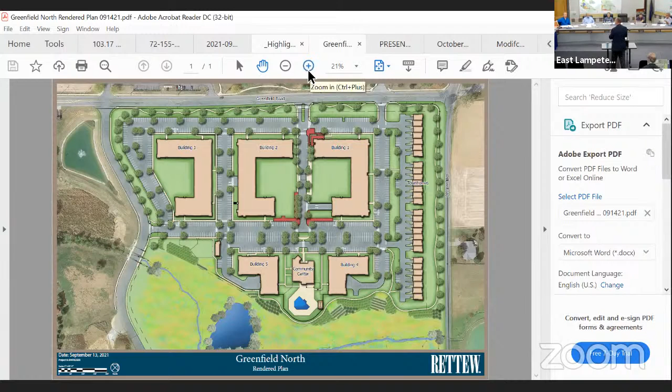Greenfield North, which is depicted on the color rendering and also on the screen, is a multi-family project that we talked to the board about in the past, consisting of 615 total units, 587 apartments, and 28 townhouses along Willow Road.

We're in receipt of the DMA review letter number 2. Review letter number 1 is considerably longer than what we have right now, and the planning commission presented to them this week, thanked us for working together with staff and carrying that review letter down. We're also in receipt of the Lancaster County Planning Department memorandum. I'd like to talk to you about the DMA letter and also the planning department.

Then I would like Tony, he's moving, to briefly review the color rendering and some of the specifics of the site plan. And then Brad, who has not moved and is to my left, will review the elevations for both the multifamily apartment buildings and also the elevation for the townhouses along the way.

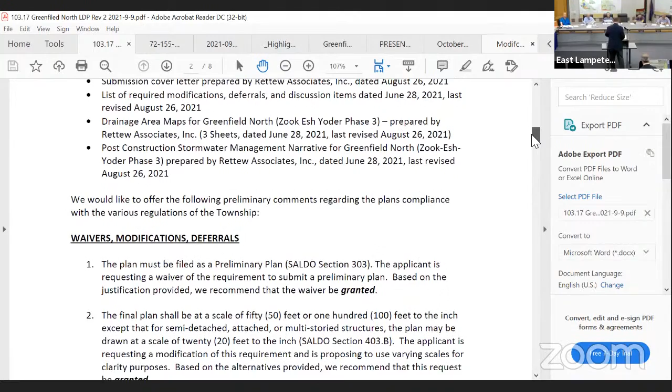So generally, we're comfortable with the comments under zoning, subdivision and development, and also the stormwater.

The waivers and modifications that are requested are itemized on pages 2, 3, and 4. Except for items 3 and 4, each one of the waivers that are requested has either been recommended for approval or recommended with conditions.

With respect to number 3, initially we had asked or sought a deferral of the road widening for Willow Road. When we had a discussion with staff, we went back and forth, noting that the urban growth boundary runs down the center of Willow Road. To the north of Willow Road is the agricultural zone. We have provided all necessary right of way along our frontage from Greenfield. Instead of asking for deferral, we had discussions with staff, and we're asking for a waiver of the road widening. It is consistent, I believe, with what is there, with your long-range plans for the urban growth boundary, and not wanting to change the general character of the road. Staff is in support of that waiver, and the planning commission has recommended it.

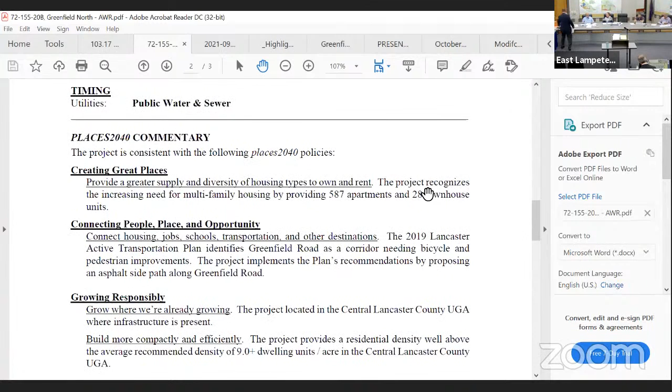I was about to get yelled at. Is that one on? They really don't make a noise. There you go. Oh, I do.

The first comment related to extending connections to the path that circumvents lot 3, between the openings to the townhouses. But what the planning department was not aware of is there's about a 9 to 10 foot grade change between Willow Road and the front of the townhouses, so it really becomes impractical. There is connectivity because of the connections that currently exist and are planned between the sidewalks and the path, and because of the topography, it's just not practical to add those additional connections.

Comment number 2 from the planning department is a suggestion that we extend the pedestrian path, but that also becomes impractical because of the floodplain and the Army Corps Conservation District declaration that affects the area to the east of lot number 3. So our request, which I think staff is comfortable with and the planning commission has recommended, would be to comply with the county planning department's recommendations, excluding comments 1 and 2.

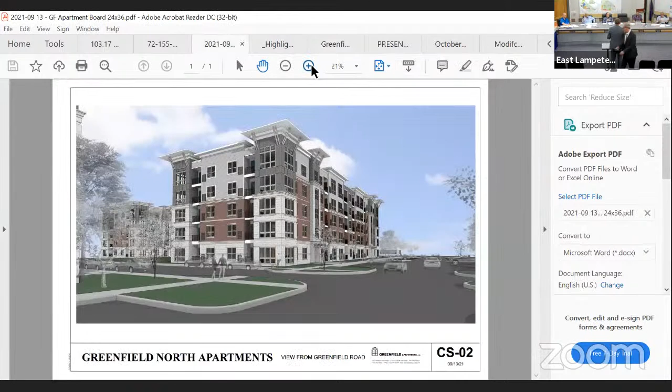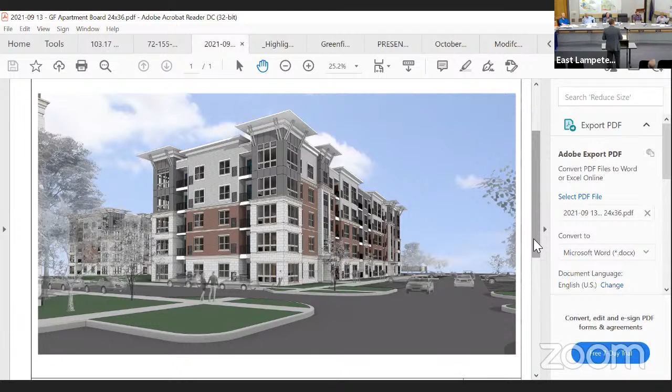What you see in front of you is an elevation of one of the larger U-shaped buildings. This is 5 stories. Again, as Tony mentioned, one of the buildings will have a leasing center strictly for leasing in one of the end caps of the building, and the balance is serviced by 2 elevators. So in the 3 U-shaped buildings, we'll have 2 elevators per building, and then a single elevator in the 2 smaller L-shaped buildings.

Really proud of the design. I think it fits a nice transitional style — not contemporary, but not something you've seen out of the 90s in terms of design. We're doing it with really nice materials that we take pride in. We're going to be here for the next 50 to 100 years, we hope longer, so we're trying to build something that withstands time, not only from a material perspective, but also an elevation into something beautiful for the community to look at.

One of the things I also wanted to point out, which we have a picture to show on screen, is an elevation of the townhomes. One of the comments we wanted to address with the commission was this elevation looking as if you're standing on Willow Road looking south.

So if you're standing on the road looking towards the townhouses, what we wanted to do was have a face that looked like the front door of a home, even though the access is primarily going to come from the other side of those buildings and the townhouses. This definitely gives a nice transition for the community to look at as they're driving down Willow Road, and it just grades into the overall site as you look south. So we think it's in keeping with the neighborhood feel of Willow Road.

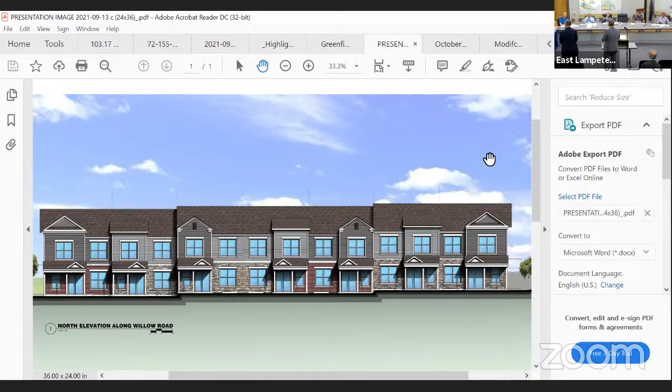Without a doubt, and part of this, as you can see, it's a little tough to see on the elevation, but there are materials that are in keeping with the larger buildings. So you'll see some of the similar masonry details at the bottom, as well as some of the siding and colors in there.

And where are you going with rents on these? What are we looking at, Brad? What kind of a market are you targeting? So what we're targeting is something in keeping with the Reserve at Greenfield. We have studio, 1 bedroom, 2 bedroom, and 3 bedroom units in the design here. Obviously, the townhouses are designed as 3 bedroom, 2.5 bath with the parking underneath. So it really caters to a wide variety of residents within the community and serves a very good need for housing to be able to provide that.

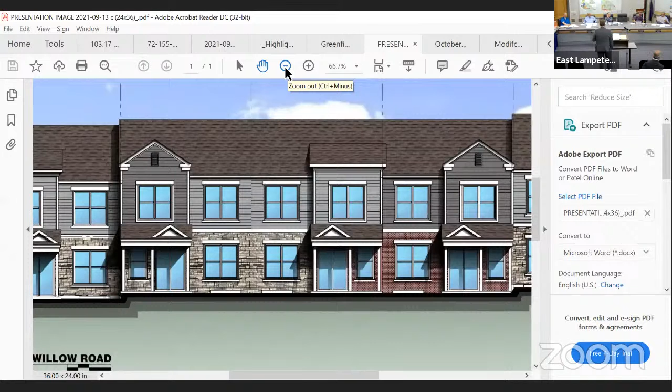Questions? Lighting along Willow and Greenfield, lighting that path - are we looking at some sort of walkway, path lighting? We're looking at street lighting. What are you thinking? What are you contemplating? I don't have that specific detail with me right this second. If it were my preference, it would be more of the bollard lighting, low level along Willow Road that would not intrude entirely on the back door of the townhouses, if you will.

Complying with all appropriate photometric requirements, still keeping in mind that the ag zone is just north of that, and not wanting to throw a whole lot of light into that, keeping in character with it. But obviously, you're looking at adding hundreds of citizens, residents to this area now. That path will definitely get used by the locals in that neighborhood and others as well too, so making it safe as well.

We're talking about the layout, the style of the buildings. You had conversations with Conestoga Valley School District. We did. We actually had a wonderful meeting with the school district. They came and met with us, I believe it was about a month and a half ago, and they were very positive with regard to the overall plan in terms of looking at the school age children that projects such as this generate. We looked at some of the statistics, most recently the Reserve at Greenfield - we have less than 2% of our units have school age children in them. The Crossings at Conestoga Creek, which is in a different municipality, but again, I think we are at 1.8% school age children in terms of the number of units. So they were really happy with us engaging them and having the conversation, as well as, most importantly, they were interested in understanding the schedule and making sure that they understood the timeline, which we shared with them based on what we hope to achieve.

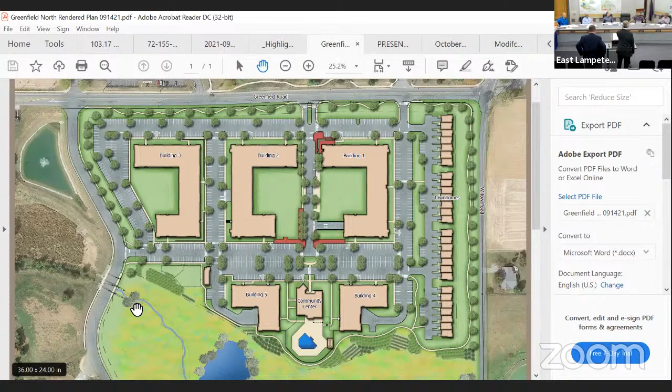I'm saying there's already existing residential units and there's existing recreation space. I'm comfortable looking at the entire campus, but I'd want to see the calculation for the entire campus and all the units. Yeah, I look at this as the continuing build out of the business park campus and the amenities that have gone into it existing to produce parks and open space. Back to your point, Ethan, if the calculation for the whole campus is in line, I think we're continuing that same intention.

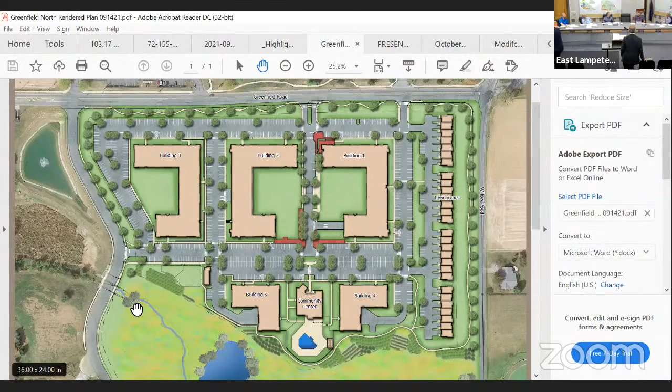If we aren't currently in line, and we take all of the residential that's in this campus, and we don't have sufficient acreage for the parks and open space, we've got to look at what's the plan to get more of that. Glenn, well, all the recreational areas in the park, how long can that be continued to be used over and over again?

Every project that's been done in this whole area has used that as part of their calculation. Correct, you can't keep using the same stuff over and over again. At some point you've gotta do the calculation for the whole campus. That's what Ethan is saying, we can't just recycle that and say it meets the requirements for this, well, this added 617 units. Right, so take all of the residential we have in the business park, and what does that calculation give us?

Just to be clear, the requirement in the ordinance is for residential 0.027 per unit, for non-residential 2.5% of the acreage. So are you talking about both? Yeah, both. Basically, what's the requirement of the ordinance, and then what's the total acreage? Is it there for the business park already, if you put this into it? Is the existing use already using up that, or is it not?

No, I see your response, but you're going to come back and say you need 107 acres. They're going to need a heck of a lot more acreage than what we're talking about for this project. Exactly. But the board has utilized its discretion over the years to look at that and work through it.

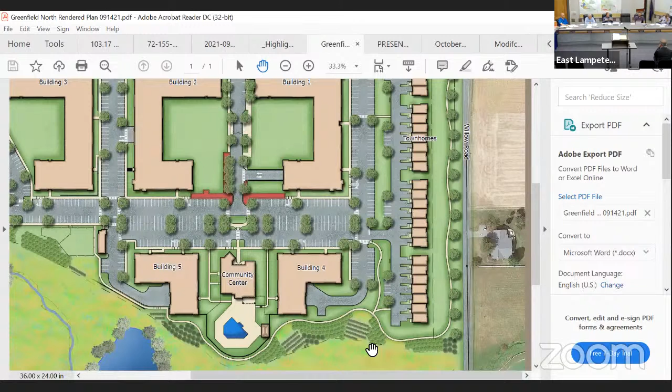Ethan and I have framed it as: the applicant is saying, hey, we'd like you to look at the entire business park, we've got these 44 acres and 9 acres of pathways, and we're seeing this as part of the whole. And what Ethan and I are saying is, that makes sense, we see it as part of the whole, but come back to us — what does the calculation tell us per all of the requirements of the ordinance for the whole business park?

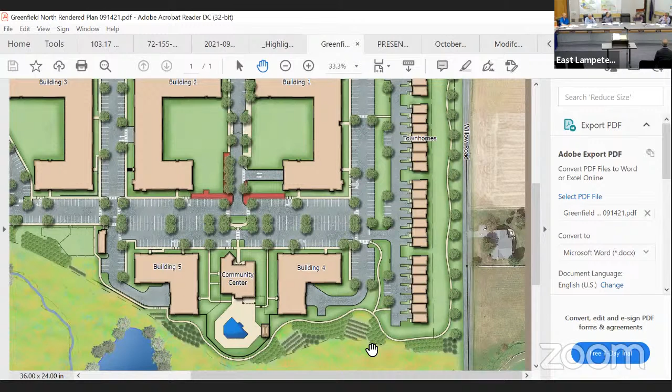What would parks, open space, recreation look like for this? If 44 acres has been, as you said Glenn, brought up a number of times, where are we at now that we're reaching the level of development we are?

Dave is saying it makes sense to look at this in terms of the whole aggregate and see what it is. We have as a board allowed ourselves discretion when an applicant comes in. If the applicant comes back and says we have to have 150 acres, I don't think anybody here is naive enough to think we're going to go back and require that. So we say, alright, you've got 3, we need 16, and what kind of fee in lieu of that can we do?

Another concern I would have, if I was my associates, is have I spent money already as fee in lieu of, and how does that weigh into this discussion? That would be another concern. So I don't know how difficult that would be.

So we could try to look at the campus, or we could say what's the difference here, and come up with a number. What Dave is saying is, keep in mind too, what the applicant has done over the years is given in lieu of, as opposed to acreage. Dave is asking, is that feasible? We could even calculate that and bring it in.

Should be able to. I mean, this is the largest development we've had, it's massive. So we've got to think in terms of the right way to approach this for both the community and the applicant. We're comfortable in doing that. It's very reasonable on their part to give it to us holistically. It's a condition of the environment we have to satisfy and solve as part of our recreation planning.

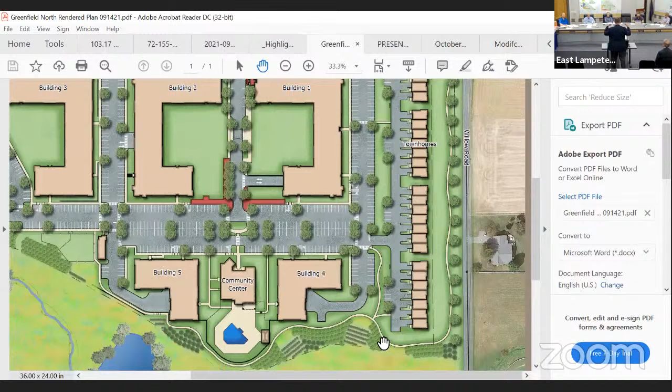We'll use our best efforts to come up with timing for the rest of the difference. We can't slow this down to make sure this happens first before this happens second, before this happens third. We know the planning that has gone into the street extension, acceleration of design, permitting for Greenfield, Hempstead. We believe this traffic will be addressed.

We did the holistic, general comprehensive traffic study for the intersections that the township agreed to as part of the Walnut Street extension. We got several developers to address this type of concern. Our hope is, between what the applicant has done with all this planning and over the years, the relationship between my property and the township, that we'll be able to move forward with this project.

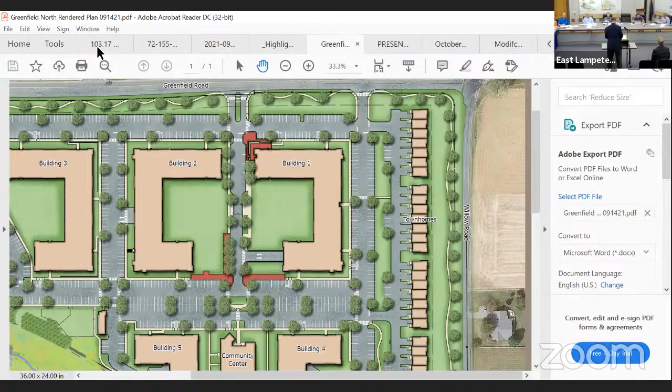Okay, so we've heard from the applicant. We've had significant board discussion now for an hour. Staff has made some comments and recommendations. We have the township engineer review comment letter dated September the 9th - is that correct, Ralph? We've also had the county planning commission, county planning department look at this, dated July 16th. There are some comments here.

We've heard from the applicant that regarding the site design commentary from the county planning department, perhaps points number 1 and 2 are items that they feel are just not feasible, and they'd like us to consider removing those two comments.

We've heard from the applicant that in the DMA letter, the township engineer review of September 9th, under waivers and deferrals - correct me if I'm wrong, Ralph, just to make sure I'm capturing this - item number 3 and 4, the widening along Willow Road in point number 3, that the board remove that completely, grant the waiver.

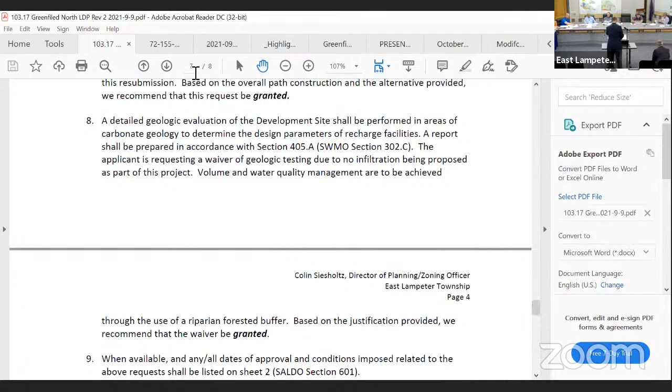Under subdivision and land development, page 7, point 8, the applicant is going to get back to staff and eventually to the board with some calculations as to historic park, open space, and greenway requirements, as to what those historic efforts have produced within the entire business park itself, and how those calculations may reflect upon what the board would consider for the same requirement for this plan.

So the township engineer's review letter indicates a recommendation that they be required to satisfy the park and open space requirements in the subdivision land development ordinance. If that's a condition of approval set by the board this evening, then the applicant is going to have to come back with a proposal on how to satisfy that requirement. I've heard your discussion this evening - look at the specifics as it relates to this, look holistically at what the business park provides. Either the board says they're comfortable with what we're proposing, or if there's a discussion, we'll have a discussion.

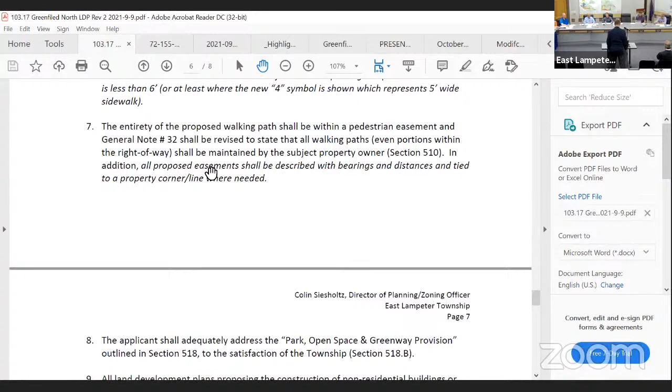It did. Okay, so when you look at the DMA letter, the engineer's letter, that 0.8 was one we're conditioning—if we put a motion out, we're going to condition that it be satisfied. And then 0.3 and 0.4, we are suggesting, and the applicant is asking, that 0.3 be waived and 0.4 be deferred as per the DMA.

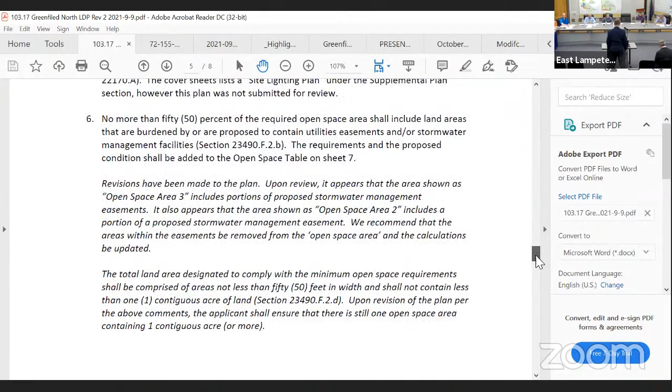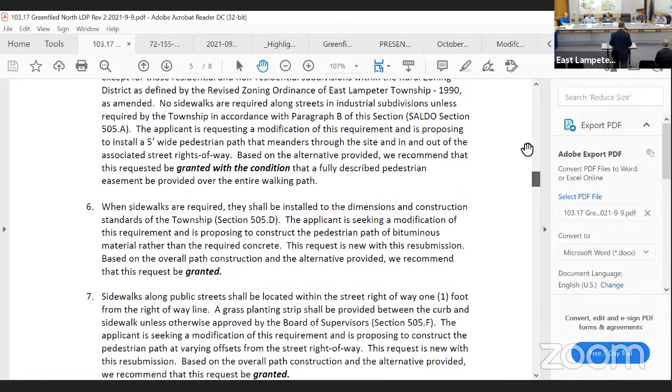Okay, tried to summarize it—I think it's in the notes and the recording. So what's your interest? Do we have anybody online? No one in the chat, and we have no one by email. Okay, thanks, thank you Dave for asking that.

Appreciate that, okay board. What's your interest? Do we need someone to repeat all that, or can we just do a 'so move'? Because I'm happy saying so move. Can we just do that? Based off what John said, you could also just say your statement was a motion—that's also perfectly fine, or do you want someone to repeat it? The chair is allowed to make one.

All right, okay, so I'll make the motion as my statement just summarized: as per the David Miller Associates letter of September 9th, waiving 0.3, deferring and agreeing to 0.4 under waivers, modifications, and deferrals, and 0.8 underneath the SALDO requirements. Applicant will be getting back to staff and the board on how to satisfy the park, open space, and greenway provisions, and taking into account Lancaster County Department of Planning points 1 and 2 as relates to access to townhouses on Willow Road and the pathway continuing along Willow Road, removing those 2 points.

Second. Okay, I'm sorry, for staff's benefit, I just want to make sure it's clear that with respect to the park and open space, the applicant is required to satisfy that condition as listed on the township engineer's letter. To satisfy the park and open space—that's what I meant. Yes, correct. Correct. Correct.